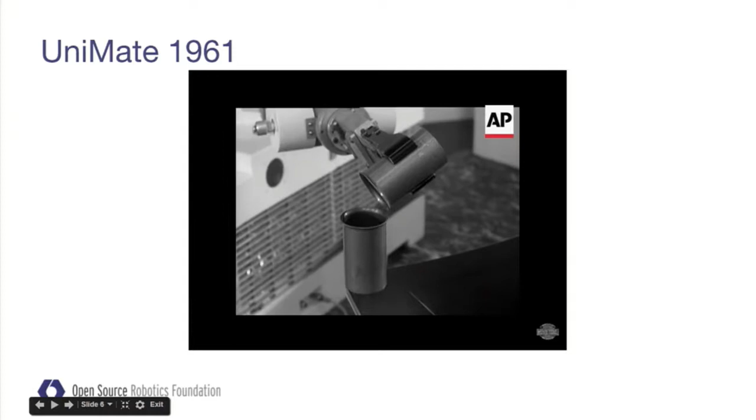So, not quite 1941, but more recent than that is 1961. This is one of the first robots that you would probably recognize as a robot. So this is a news clip from 1961 where they're actually showing off this robot on a variety show type situation. It's the Unimate, and they advertise that this is the thing that's going to replace all workers and can do everything with precision. It doesn't get tired, and you'll note it's very precise.

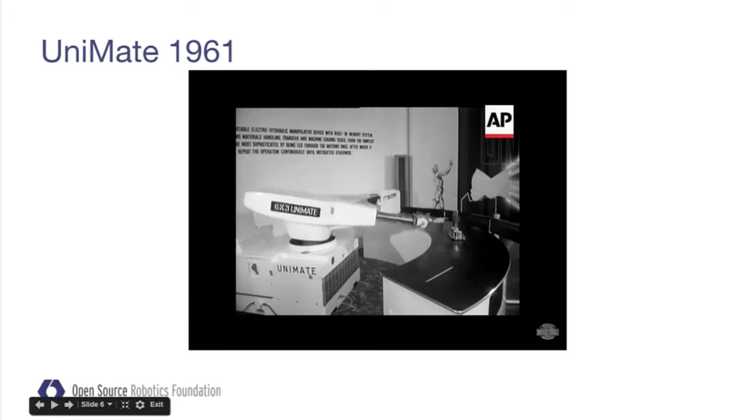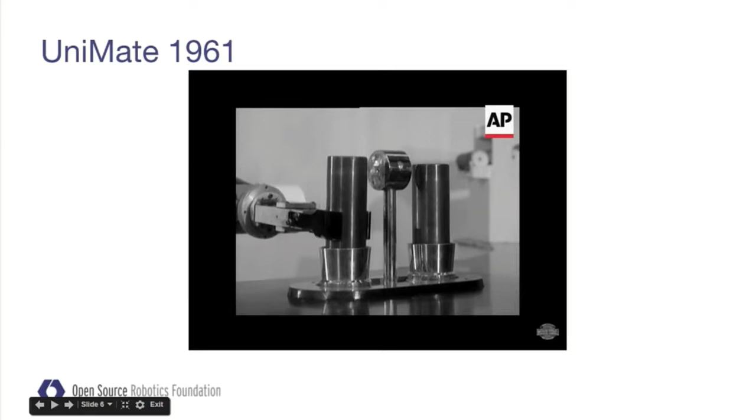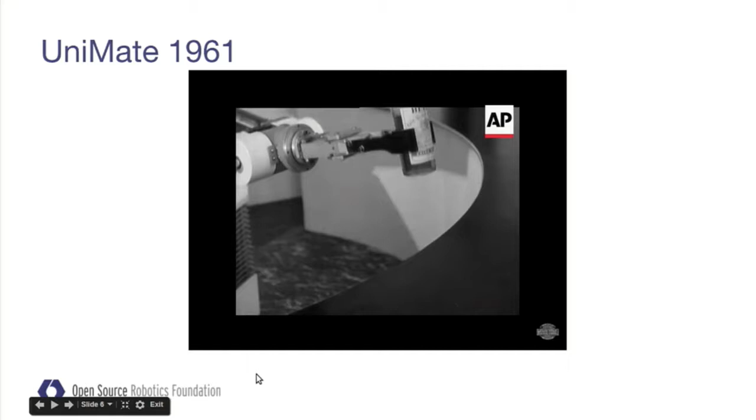But it doesn't have any feedback. It does exactly the same thing every time. But it's surprisingly similar to all of industrial automation since then. So looking forward, there's a general theme of why we're going toward embedded Linux, which is cost reduction.

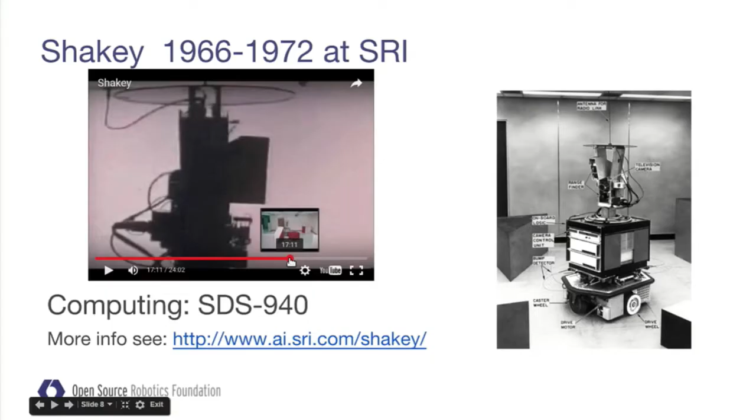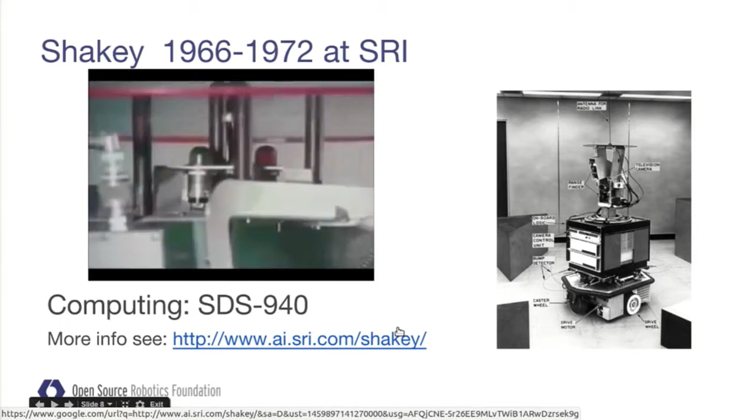So another early robot is Shakey. It was developed at SRI. If I jump to 17 minutes here, you can see this is a robot walking around in a very unrealistic world where everything is perfectly prismatic. It's either white or red, and you can then navigate through it. For reference, this is using an SDS 940 before Xerox bought it when it became an XDS. You can get more information from SRI's website there.

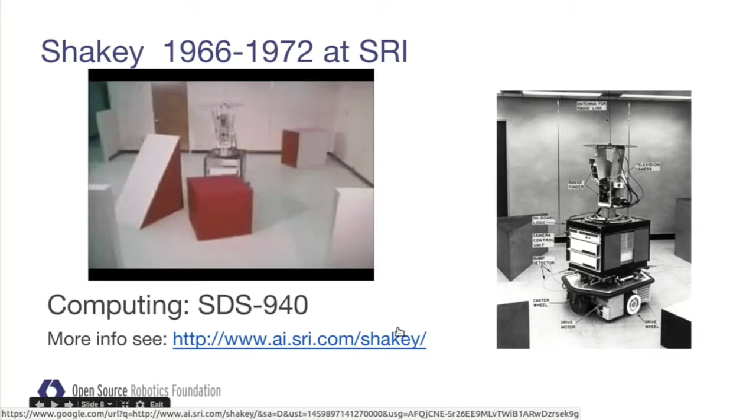But this robot was state-of-the-art, brand new computers back in the day. It can navigate around. It can keep track of the obstacles that it knows exactly the size and shape of. And it's a great demonstration of all those things that we want robots to do. But it really could only do it in a contrived environment. I have no idea what this cost to build, but you can see it was like a 6-year project, with probably a lot of researchers, and the cost of the robot was similar to the researchers' salaries at the time.

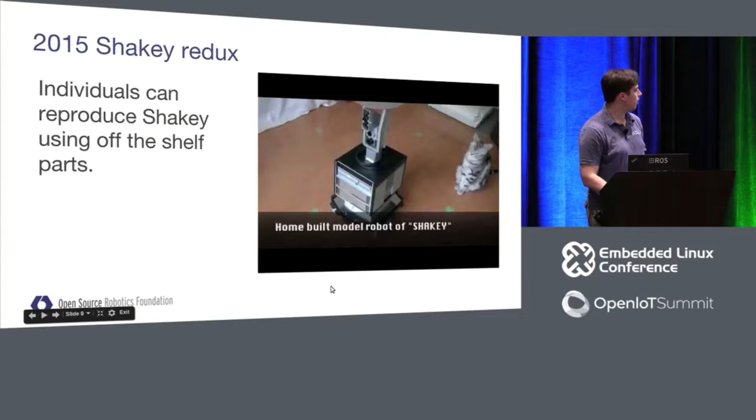I was searching for the other video, and I ran into this one, which is embedded on YouTube, and it's your standard hobbyist robot. It has the cat in the background of half the shots. And it's just off-the-shelf parts, pulling them all together, which shows you how much change there has been in the last 30 years, and we're continuing that trend, which is pushing smaller and smaller.

So looking more at the personal robotics space, in fiction we have some very, very capable robots. You've got Terminator in the Terminator series. This robot can see better than you, it can run faster than you, it's stronger than you, it's smarter than you. And likewise, we have a little bit older Rosie the robot on the Jetsons.

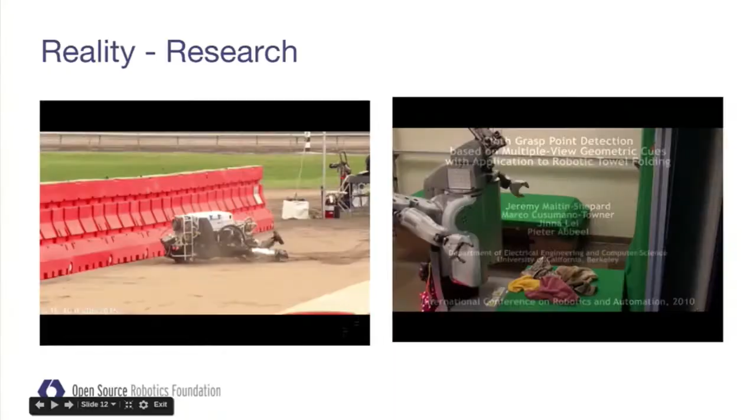She's the robot that will come into your home and take care of anything that you don't want to do, so that you just sit around and do what you enjoy doing and don't have to worry about any of the chores. These are great visions. They've been around for a while, but it turns out we're not really there at the moment. In reality, we have humanoid robots that can barely stand up, and we have robots that can fold towels.

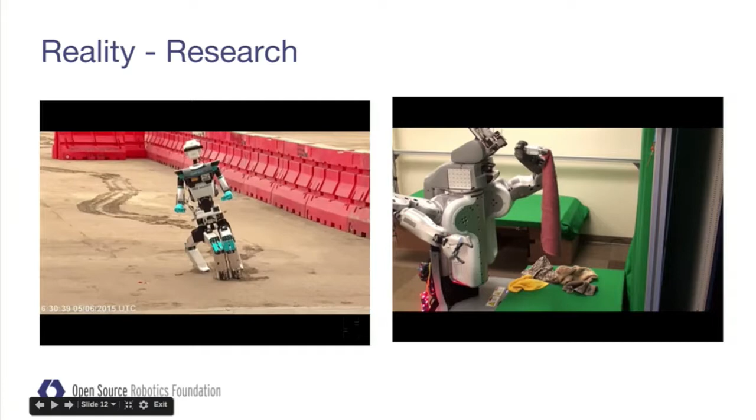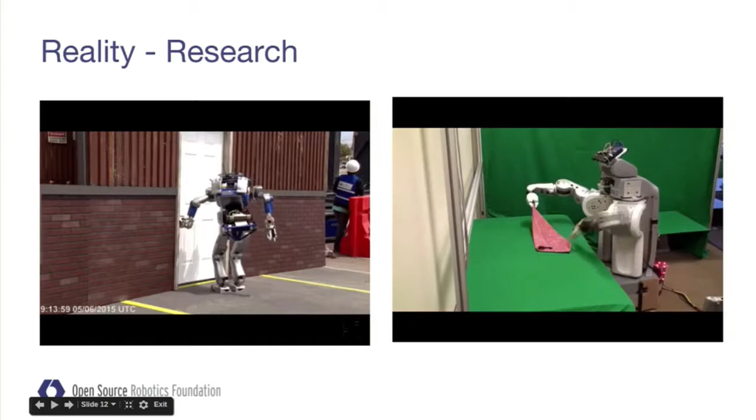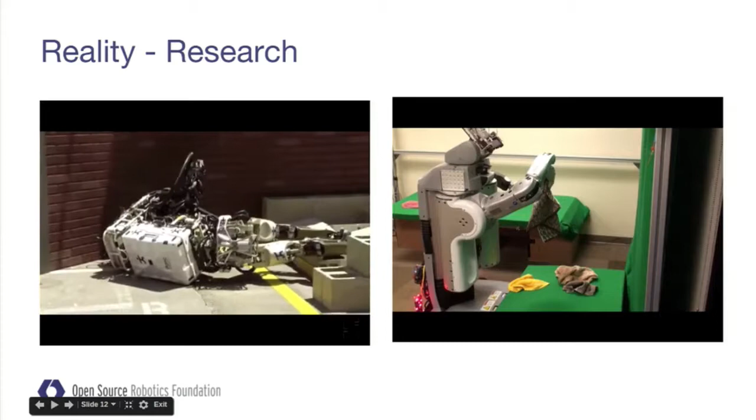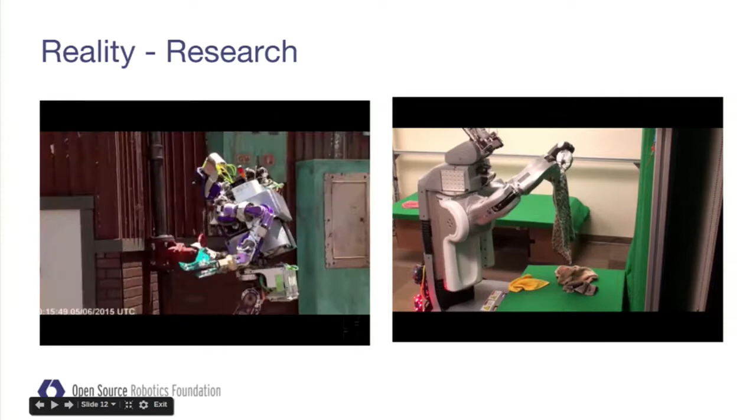This is results of research from a DARPA program that ran last spring on the left, and on the right is a towel folding robot. And what you can't see in the towel folding robot is this is a speed time lapse with 50x. So it took something like 2.5 hours per towel that it folded. They got it faster over time, but it's not a trivial amount of work to do.

And it's kind of horrible to watch all these, but they are fun to watch. That's a good example of where it was just a software configuration. They had 2 different controllers for the leg, one for walking and one for driving. And they forgot to turn off the driving controller when they were starting to transition to walk. So as they stepped out of the vehicle, there were 2 controllers fighting for control of the leg. And that's why you can see it jiggling, because one's saying step down and one's saying press on the gas.

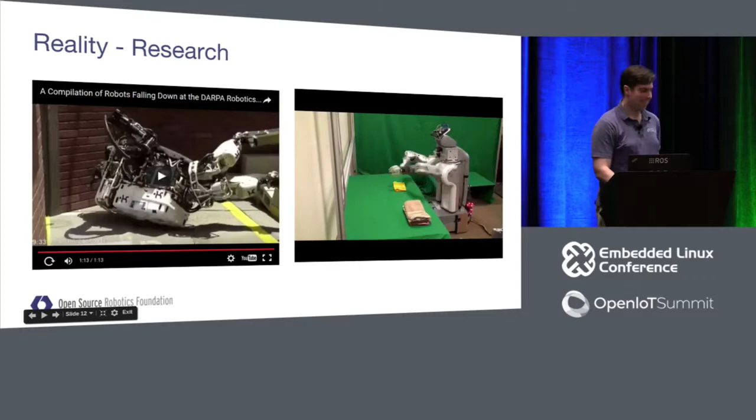So we're making progress on the research. But in reality, for personal robots, the only one that's really out there is the Roomba. It's been around for 10 years, and the big difference with the Roomba is that it's running on a microcontroller. It's not running a microprocessor. It doesn't have much logic. If it wants to find its way home and it's not in front of its beacon, it has the very scientific approach of doing a random walk until it sees its beacon, and then it can home on the beacon.

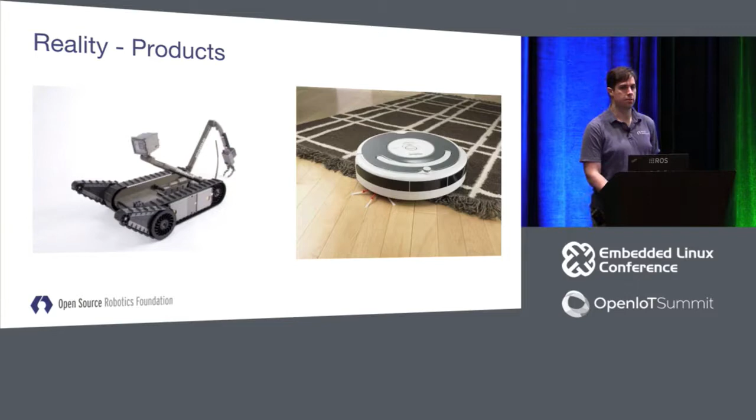That's why the people that are the best at operating it are the guys that have played video games the most. That's actually a valuable skill now in the military, because if you've played a video game, you can control one of these robots better. But looking at cost, if you want to go to volume in robotics, you need to have the unit cost way down, which is another thing that is super valuable with embedded Linux as we start to look at what options are available there.

And we ended up failing because we drove through one barbed wire fence going downhill. We tried to get back through. We dodged through a bunch of scrub brush, and then we tried to go back uphill through the barbed wire fence. But we were too conservative on our throttle limits, and we couldn't knock the fence over and then drive over it.

Carnegie Mellon made it the farthest with 7 miles, and they went out because there was a gate, and typically you drive through the gate. They drove through the fence post, bent their steering shaft, and high-centered themselves in the next mile. A little bit more fun. DARPA considered that a good response. They did not get as much as they wanted, but they continued to sponsor another challenge, and I was involved in this one again.

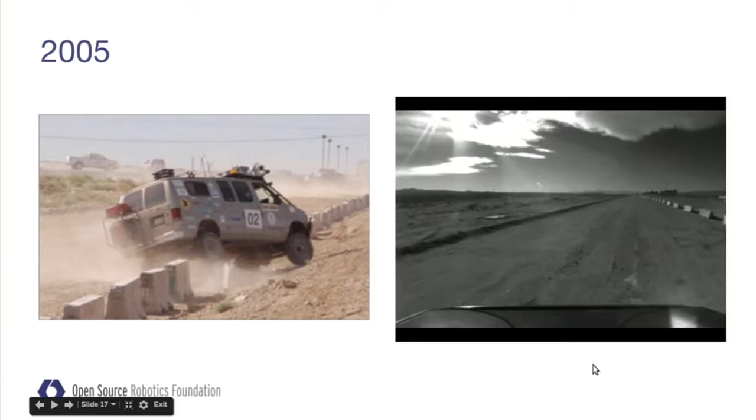You can see the robot, it's stopped under some power lines. It lost its GPS, but it says, well, I can't reacquire GPS, and kept going. There was a bug in the reinitialization code which made it think it was driving straight down the road, but it was actually off by a couple degrees. And you'll see that this has a poor effect.

It's a fun video. I like showing it. It shows you quite where we were before, and this is only just over 10 years ago now, which is kind of hard to believe. There were 5 other teams that completed this race. This is the view from the other side.

So, a lot of fun projects. Running inside of this were several rack mount computers, and you can see on the back we actually had a generator attached to the vehicle. We had a large alternator on this, but it was not enough to power the computers. We actually needed a generator bolted to the back of the car to run AC power inside to keep the computers running for several hours.

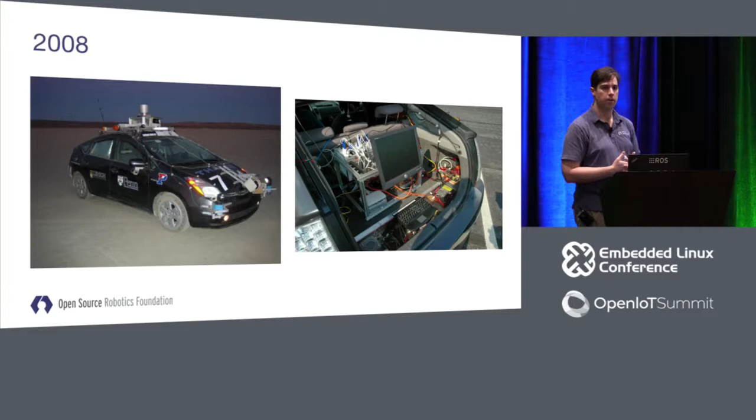You can see on the back we were actually using Mac Minis at the time. The computers are getting smaller, less power. We were able to run the whole car, all the computation off of the hybrid power in the Prius, which was really great. You found a lot of teams picked hybrid cars because they had a large battery pack that could support the large AC load.

And of course today, you know that Google's out there driving lots of miles. There's now, I think, 7 companies which have authorization to have drivers on the California roads testing. If you go to the California DMV website, you can click to fill in the form to apply for yourself as well. So we made huge progress in just the last 10 or so years.

They actually did. Those videos I showed you earlier showed the robots with battery packs. But those battery packs were so dangerous that the manufacturer would not ship them to any of the teams that had Atlases at their facilities like this one. They would only provide the battery pack to them at the competition. So prior to the competition, these robots had never seen the battery pack. They actually have a battery pack simulator where that cord plugs into, and it pretends to be the battery pack and gives you the voltage that drops off as if it's a battery. But you could not actually test with the battery because that much lithium is a hazard to ship.

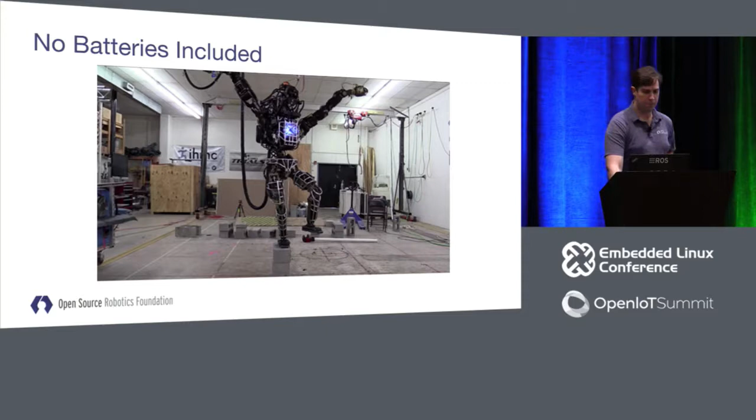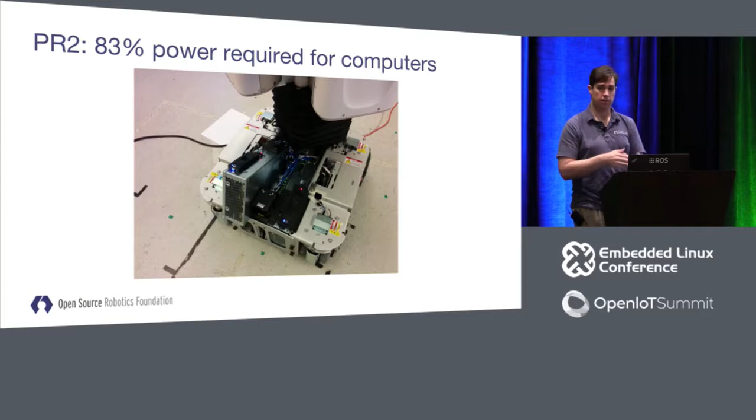And I tend to say that if you give a robotics researcher computers, any amount of cores, any amount of computation, they will use up all of it and ask for more. We gave them 16 cores of i7, and they said, that's not enough. We need more. We gave them gigabit backplane. They're like, we want more. We have to have 2. We have to run them in parallel so they don't collide, so we can fill up the bandwidth more.

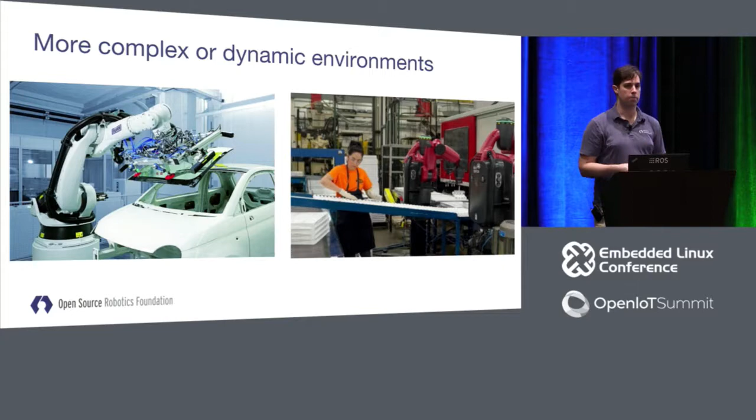But the other thing is that we also need to start dealing with the dynamic environments, both with humans in the area, but also the things coming down the conveyor belt may not be exactly in the right place. What you can't see on the left is that car is fixtured very precisely, down to probably something like the millimeter, as to where the whole vehicle is so that the arm can hit the right spot. Because just like that arm I showed you at the beginning, it's very good at doing the exact same thing. It is not good at adjusting for whatever needs to be compensated in the area.

So I've been talking a lot about why we want to use embedded, and now why do we want Linux? Obviously, we're at Embedded Linux Conference. A lot of you know about Linux, so I'm not going to go super deep on this, but just point out some of the things that are valuable to the robotics community. We want the flexibility to customize. We may need to have a special sensor. We may need to have any sort of special hardware, or we need some sort of special mode that we can put it into. Being able to go down under the hood, recompile, fix it, add the functionality, that's super valuable. We both need the flexibility and the freedom to do that. There are a lot of platforms where you just can't do that.

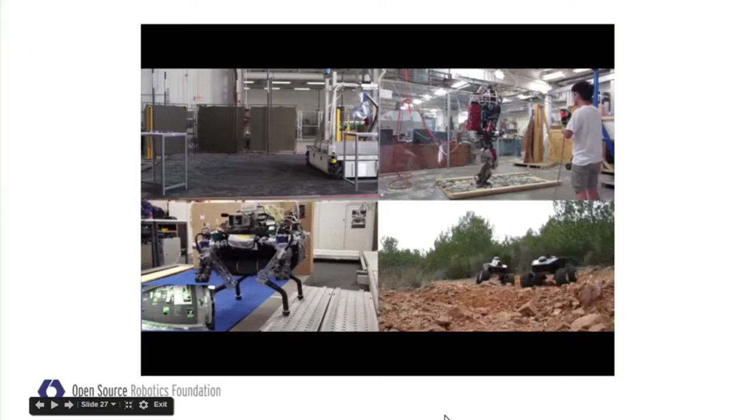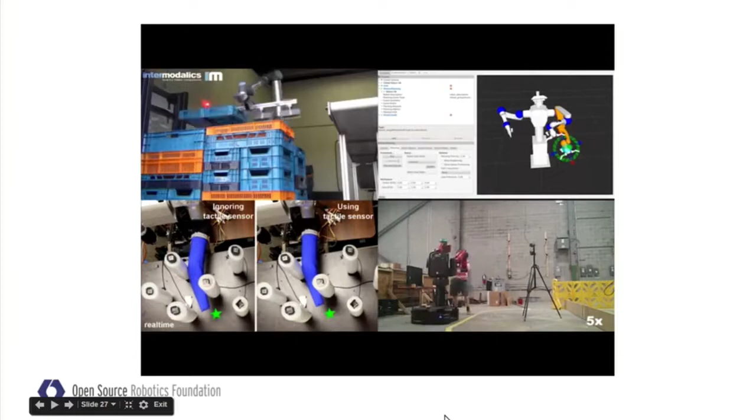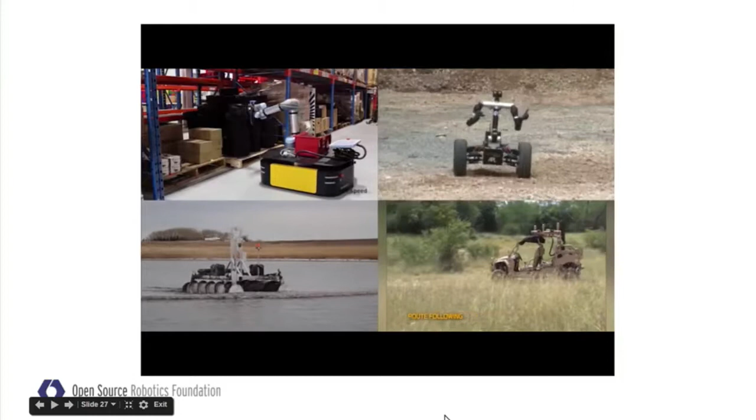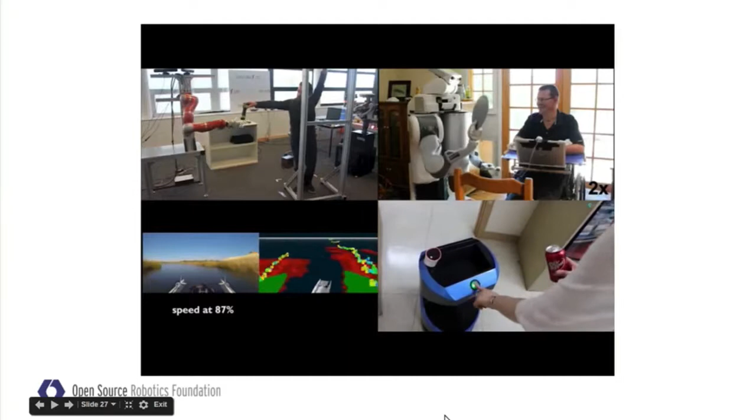We've got large humanoids, we've got robotic arms, indoors and outdoors, underwater, surface of the water, outdoor desert, logistics, commercial products, on the road, we've got flying, manipulation,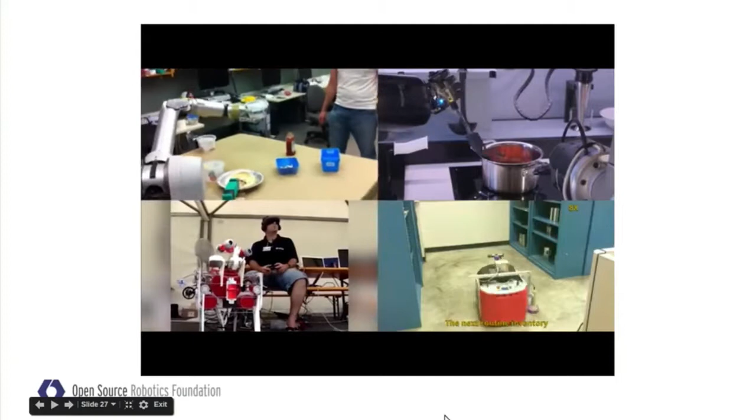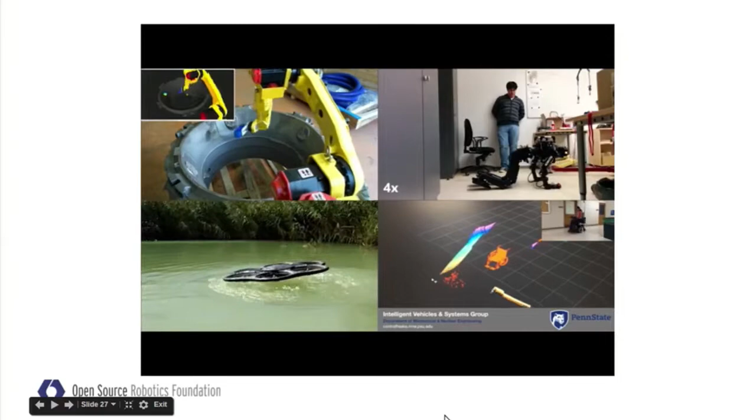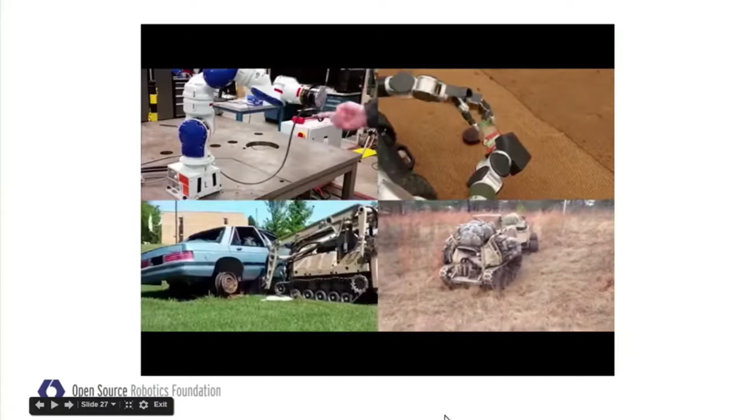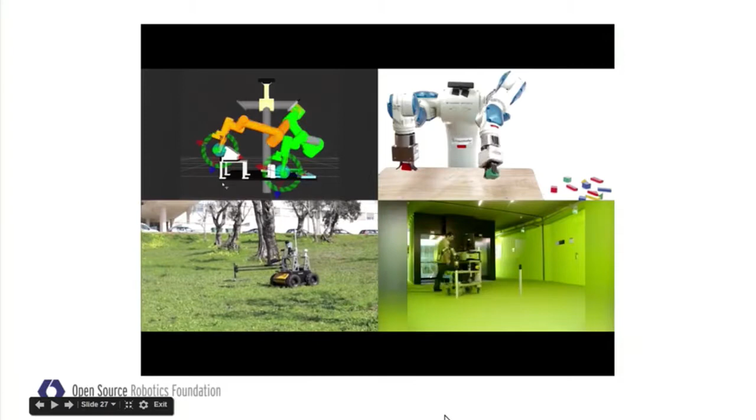and every year the robots get smaller and lighter due to improvements in things like batteries and also the availability of smaller computers. Unfortunately, the bottom right is only simulated moon. It's not real moon.

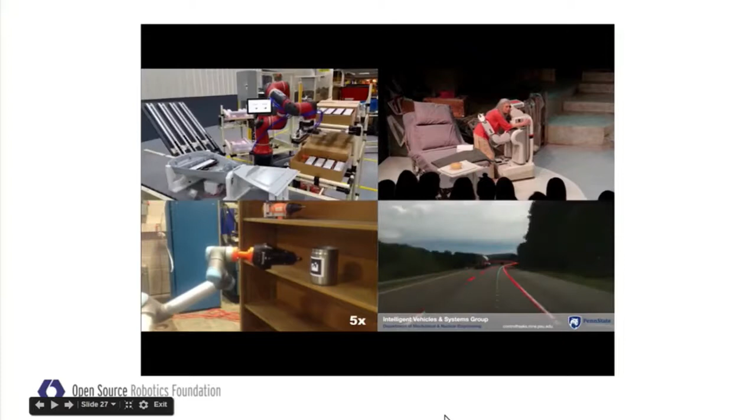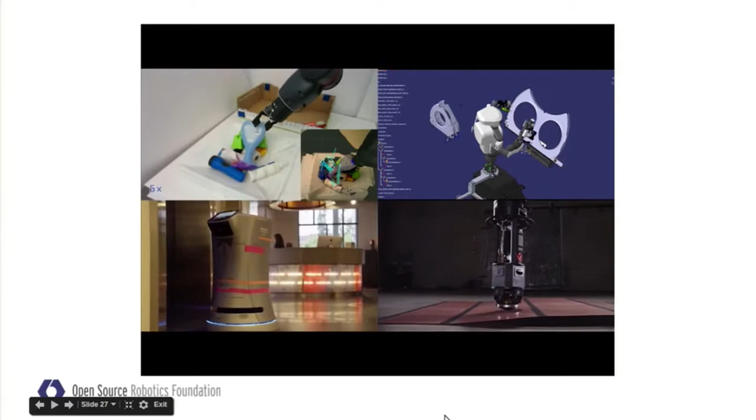One of the other things that's not evident in these videos is that almost all of our robots are actually robotic systems. They're not just one robot. There's typically infrastructure and other sensors in the environment that you can integrate with and communicate with. So as we branch out to more of those, building up these networked, small, cheap devices becomes more valuable. If you can instrument the room, so the room will just tell the robot where it is, the robot doesn't have to worry about finding out where it is, or at least which room it's in, that is valuable.

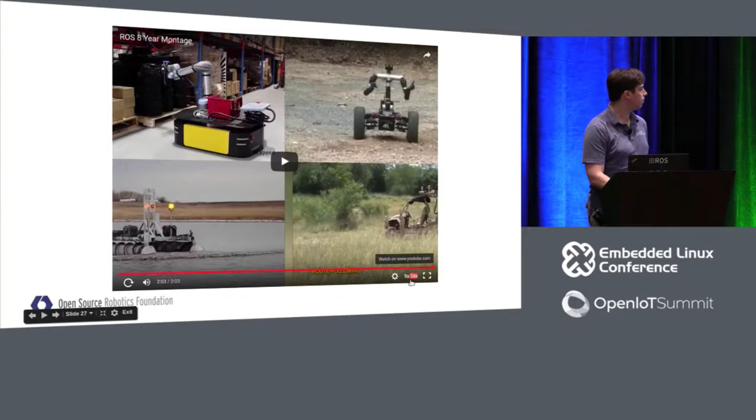So putting this all together, weight means that you take more power to move. More power means you need more batteries. More batteries means you have more weight. And you can get into this cycle that you can't do things if you just are too heavy. Similarly, bigger means that you have more weight, which means you need more power to move, which means you need more batteries. And again, you go into this cycle where you can't actually win. As you get bigger, you just get the problem that you can't drive.

Similarly, we need to be reusable so we can share, and customizable so that we can make sure that it's going to work for our application. And lastly, low cost is super, super important because for most robotics applications at this point, the Linux computers have been cost prohibitive. As we now are getting the embedded ones, they're starting to become competitive with the microcontrollers, which have been the default.

And specifically, why is this applicable to robots? They need real power. I talked about the robots that are out there. They're using kilowatts of power. For every minute of computer runtime, like when you park a robot, the motors turn off, but the computer's got to keep running in the background and stay on standby.

And you really want robots that are going to be useful. Going back to the real meaning, it's forced labor. We want to be able to have the robots be useful in our world. And to do that, they need to be able to do things like stay online for a whole workday. They need to be able to work and also keep being useful.